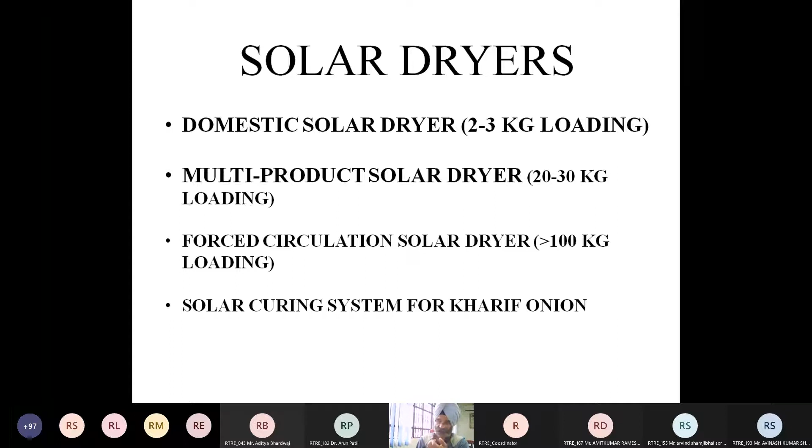So in the domestic solar dryer category, we have 2-3 designs, but this is the most recent one - the advanced domestic solar dryer, for which PAU has been granted a patent. The capacity is 2 to 3 kg of fresh produce, and generally the drying time is 2 to 3 days. For placing this advanced domestic dryer, you need a shadow-free space of 80 centimeters by 66 centimeters, and it has a natural circulation mode - we do not have forced circulation here, only natural circulation.

When you don't use it, you can place it anywhere - it has even been mounted on a platform with wheels, so you can easily move this dryer. Whenever it is not in use, you can place it inside your house, but whenever you want to use it, you can move it to a space where you have sufficient radiation. So you can see here, this is the area where radiation is captured, and from the underside of this portion, air gets into the dryer.

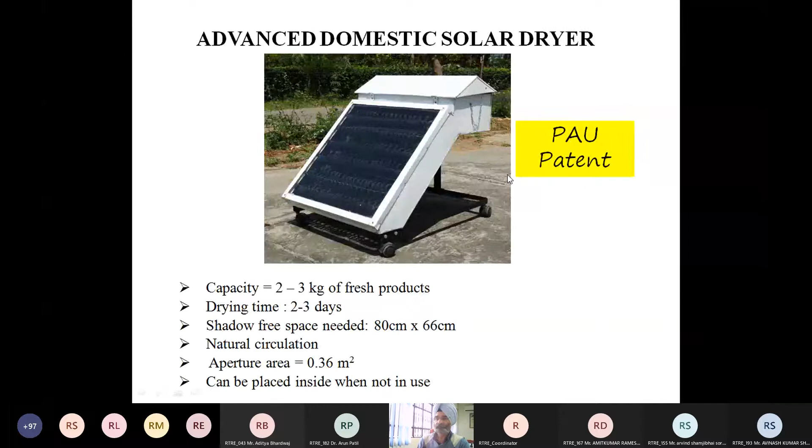Now you can see this is the drying chamber. We have two trays on which the produce is loaded. These trays are made of stainless steel wire mesh. As hot air moves from this side, it passes through the produce kept in the trays, and moisture is removed.

The unique feature of this dryer is that while all other domestic solar dryers have a flat black surface, in this dryer we have placed black metallic rings in front of the flat surface just to increase the collector area. These rings are blackened to absorb maximum radiation, so the heat transfer area has been increased. Drying time, compared to the conventional dryer, has been reduced by 40% with the use of these rings. The cost of this dryer is around 4200, and the payback period is around 200 drying days.

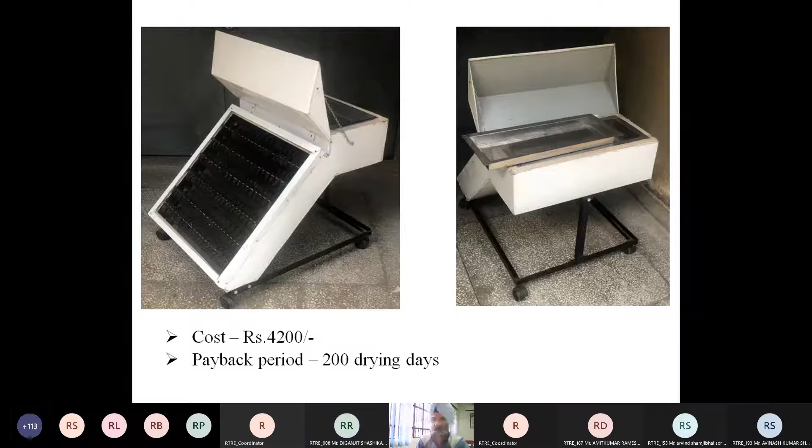Next is the evacuated tube solar dryer, and its loading capacity is between 20 to 30 kg. But this loading capacity depends upon the type of produce. If using low density produce such as spinach or chili, it could be low, but if using high density produce such as turmeric or ginger, loading capacity could be 40 to 45 kg.

In this crop dryer, we have used an evacuated tube collector. Previously we developed flat plate collectors also, but with the more efficient evacuated tube collectors, we have replaced flat plates. You can see these evacuated tube collectors - around 2, 4, 6, 15 evacuated tube collectors have been used to make the solar air heater.

Air is heated in these vacuum tube collectors, and at the top of the collectors there is a drying chamber, and at the top of the drying chamber a small exhaust fan has been placed. This exhaust fan is operated with the help of a photovoltaic panel just to draw the moist air out of the drying chamber. Since the produce is more, more moisture will be present, and we have introduced circulation of moist air with the help of the exhaust pipe and exhaust fan, which is operated with the photovoltaic panel.

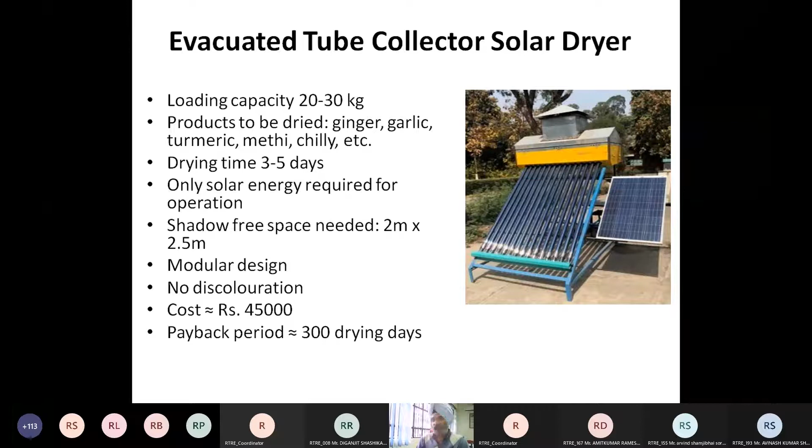Only solar energy is required to operate this, and the cost is around 45,000, with a payback period of 300 drying days. These are other views of this technology, and this is the view of the drying chamber - you can see we have placed 6 trays. Initially we had 3 trays, one single tray, but we divided it into two. Now we are loading 6 trays.

Instead of 3, we are using 6 trays for ease of operation, so it is easy for a single person to handle. Otherwise, if we use 3 trays, the size increases, the capacity almost remains the same, but handling becomes difficult. This chamber contains 6 trays, and this is the view of the tray. It is made of stainless steel wire mesh, so that any food product or agricultural product does not get contaminated during the drying process.

This chamber is insulated from all sides using thermocol, and you can see this is the thermocol which has been used for insulation purposes.

Around 13 installations for this kind of dryer have been made by PAU, and these locations are not only in Punjab but across India.

We have installed 2 such crop dryers in Dehradun in a society named Himmotthan Society, which is an enterprise of Tata Trust. They are using these two multi-product solar dryers for drying the fruit crop of different farmers.

The second one is Nature's Urja, which is in Himachal Pradesh, and there's one dryer installed in Punjab in Moga district, with 9 more such dryers installed at other locations. I don't have the details right now. So at 13 locations these dryers have been installed. Any questions?

Now, as one of the participants asked about the previous technology, the domestic crop dryer, regarding its size: the evacuated tube collector is 1.8 meters in length, with an outer diameter of around 58 millimeters and an inner diameter of 47 millimeters.

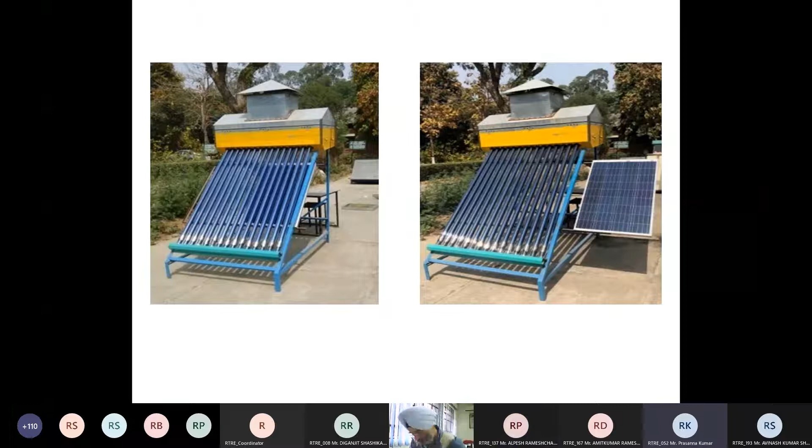How to decide the distance between each tray in the drying chamber? Or how to decide the loading capacity of each tray? Sir, actually, how much gap needs to be maintained between each tray in a drying chamber? Is it required or not?

It is required. I'll answer in two parts. When you carry out drying, preferably it should be thin layer drying. The depth of this tray is around 4 inches, so we fill this tray up to half of its capacity. When you carry out thin layer drying, then drying is faster.

If you carry out thick layer drying, then sometimes what happens is the lower part of the produce in the tray comes in contact with the hot and dry air and gets dried, but as the air moves up it gains moisture, and the upper layer of the produce does not get dried, rather it gets wet. So we have to carry out thin layer drying and keep almost half of the tray empty.

Hello sir, how can you control the temperature of this unit? Temperature can be controlled, yes.

It can be controlled because for every agricultural produce, the optimum drying temperature is up to 65 degrees centigrade. If the drying temperature exceeds that, the exhaust fan starts operating, and if the drying temperature is below that, it will stop working. So you can set that optimum temperature depending upon your produce.

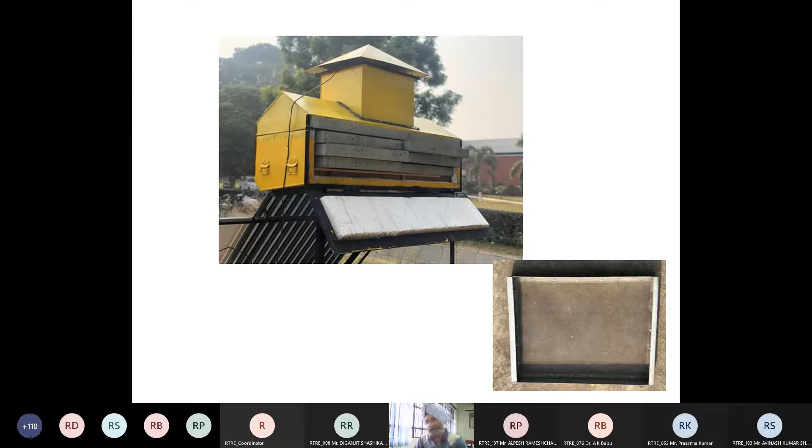We approached Punjab Energy Development Agency, which is a nodal agency for renewable energy technologies. They have funded around 9 such dryers, installed at food process organizations and small cooperative societies. They process fruits and vegetables, and are also into pickle making. They funded the entire cost for such organizations.

Again, our industry partner is Vishwakarma Solar Energy Corporation, situated in the town of Phillaur, near Ludhiana.

Now next comes the forced circulation solar dryer. This dryer has been adopted in maximum numbers, not only in Punjab but at the national level also. We started working on this dryer in the year 2010. We came across a number of agro-based industries which wanted large capacity dryers they could use commercially also.

Otherwise, till then we had these small capacity dryers meant to be installed at a house or at the domestic level, or small agro-based industries having a capacity of 40 to 50 kg. We realized that if we want to use solar energy for drying crops, then we need large capacity systems. So we visited a food processing organization called FAPRO.

In this society, there are 300 farmers who are into cultivation of turmeric only, not wheat and paddy. As you are probably aware, in Punjab a lot of emphasis is now going on moving away from paddy and wheat because of the depleting water table. We are using excessive groundwater for cultivation of paddy, and due to that the water level is going down, and turmeric is seen as one of the alternative crops.

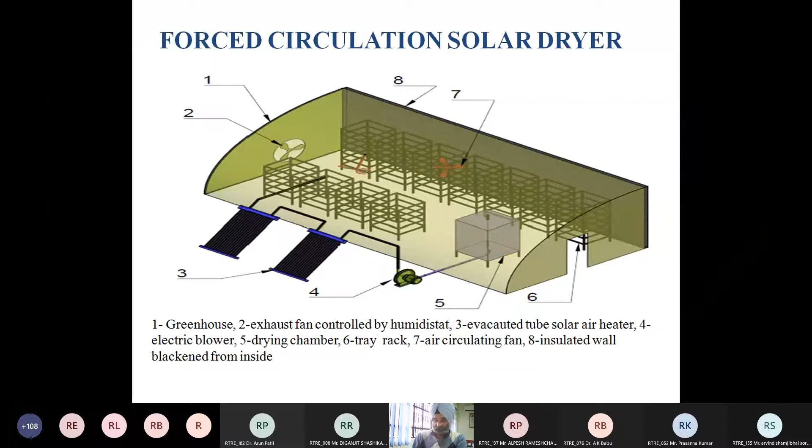Coming to this installation, as I've told you about the society of 300 farmers who are into turmeric cultivation, this dryer has been installed in the premises of that society.

You can see this is a pakka floor, right? And this floor was used to dry turmeric under open sun conditions.

So when we installed this dryer over there, the drying time reduced to 55%, and the quality of the product was better, not only in terms of color but also other quality parameters which I have mentioned, such as curcumin content as well as oil content.

And apart from that, polishing loss was also less. Polishing means the removal of the outer skin, and it was also less. The reason is, when they were drying the turmeric under open sun conditions, as I mentioned earlier, when the produce is wet, it will attract more dust.

So to remove that dust, more skin has to be removed. But under the forced circulation solar dryer, the product is not exposed to atmospheric dust, so polishing loss is also less.

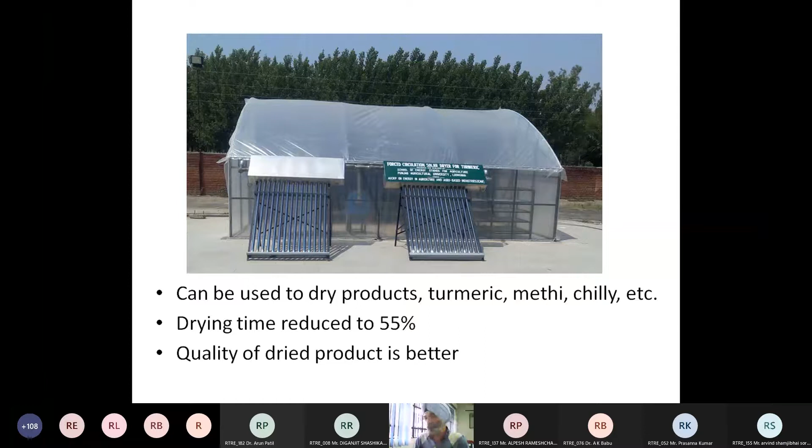We have placed the blower inside the greenhouse, thinking that some heat will be generated in the blower also, which we can utilize over here.

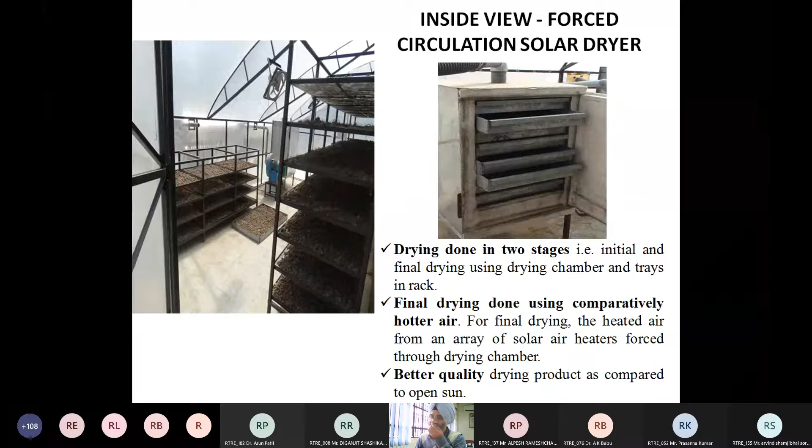So this is the inside view of the empty greenhouse. This is the exhaust fan, which I have told you, which is operated or controlled by the humidity controller and temperature controller.

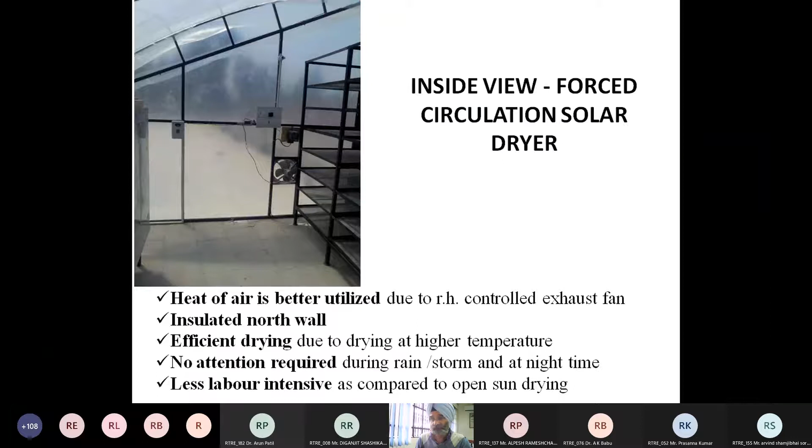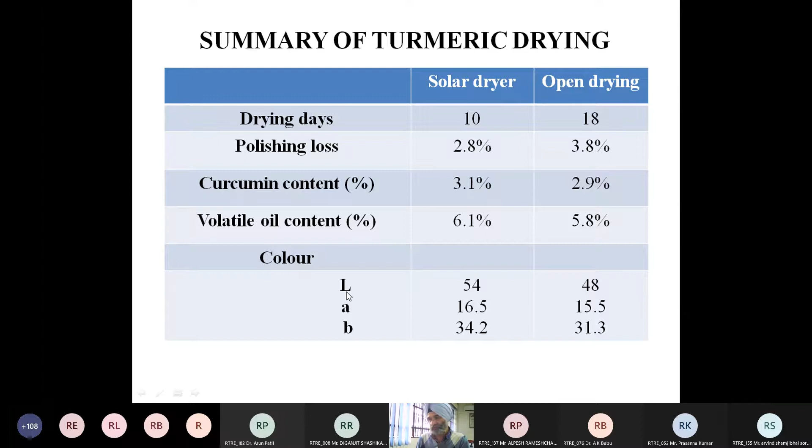No doubt it is marginally better, but it is better. And for color, these are the L, A, B values determined with the help of an instrument, and they have different significance. I will not go into the details of food processing, but they are better.

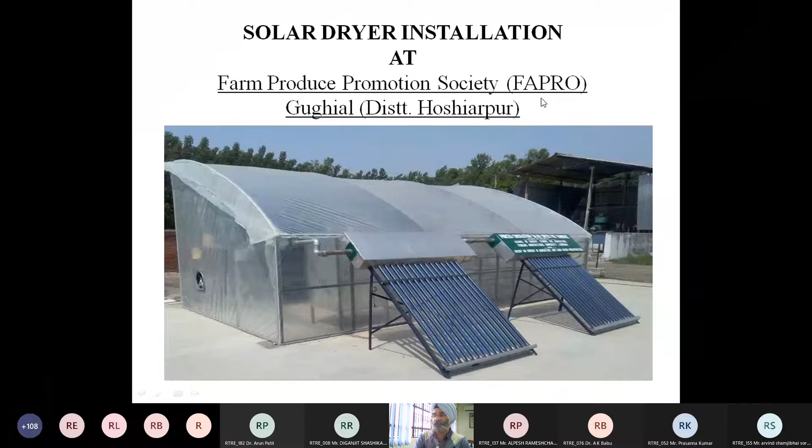I'll just show you a video.

So this was just a video of installation at that society. Now the next one, the next installation, is at the field of a farmer.

In fact, the person is not just a farmer, he is a technocrat. He retired from Hindustan Machine Tools HMT Pinjore near Chandigarh as a general manager, but he got interested in farming as he wanted to go for cultivation of crops other than wheat and rice.

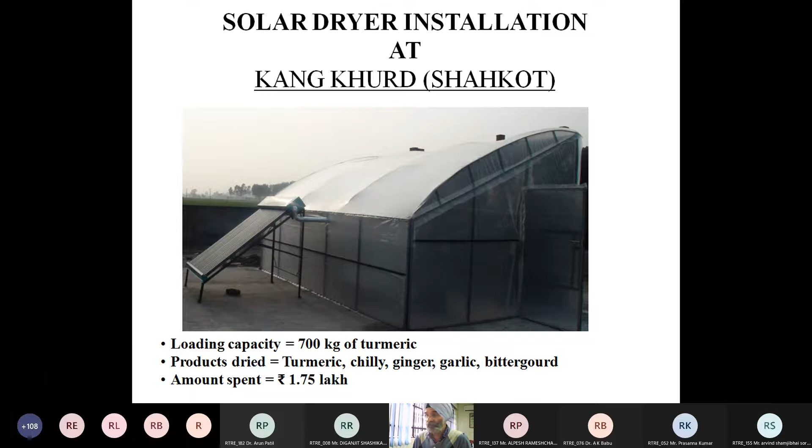This was also to show others the way, that you can go for cultivation of other crops instead of wheat and water-guzzling rice or paddy. Now here is another important aspect which I want to show.

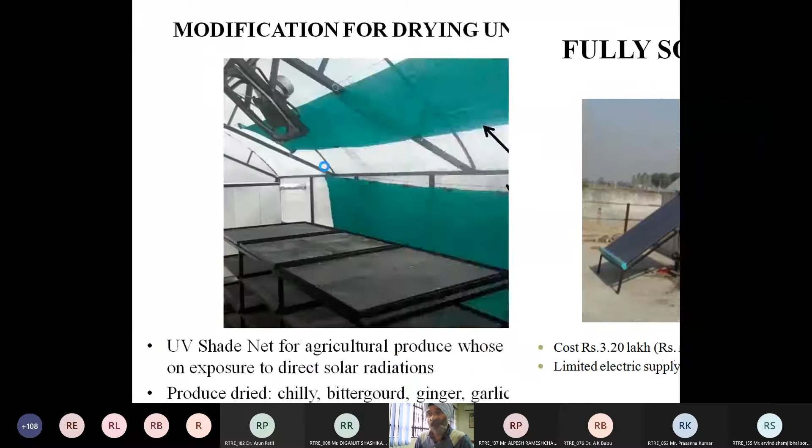As you are aware, drying is carried out by hot air, not by radiation. So radiation shields have been provided over this rack so that the produce is not exposed to radiation. This is a fan, several of which are installed inside the greenhouse to enhance air circulation. Similarly, the back row has also been provided with these radiation shields or green nets.

So again, what happened when we went for installation, you can see these solar panels. As I've told you, fans are there inside the greenhouse, and a blower is there which requires electricity. In the village, he was not getting regular supply of electricity, but he was having a 2 kilowatt solar water pump, which was not operational because the depth of water had gone down.

So these PV panels were lying idle. So instead of using an AC blower, we used a DC blower as well as DC exhaust fan and circulating fans, and connected these DC blower, fans and exhaust fan with the photovoltaic panel. So this solar dryer is completely operated by solar energy. No grid connected energy is used over here.

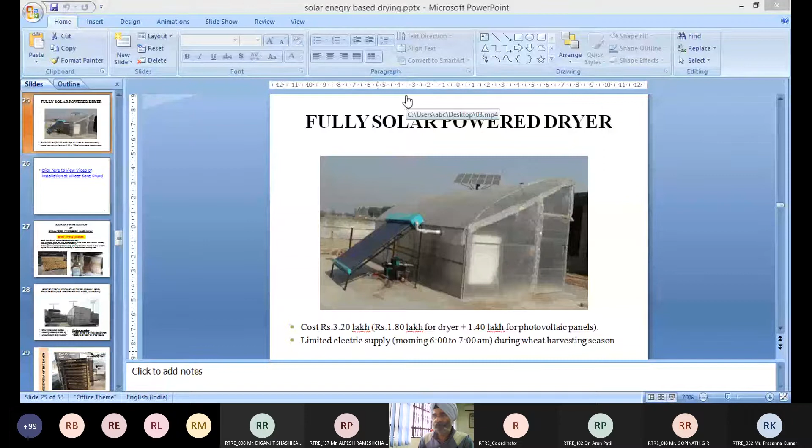Now this slide is visible fully. Yes, sir. Your slide is visible. Okay, this is also visible. Yeah sir, click here to view video. The slides are not moving, sir.

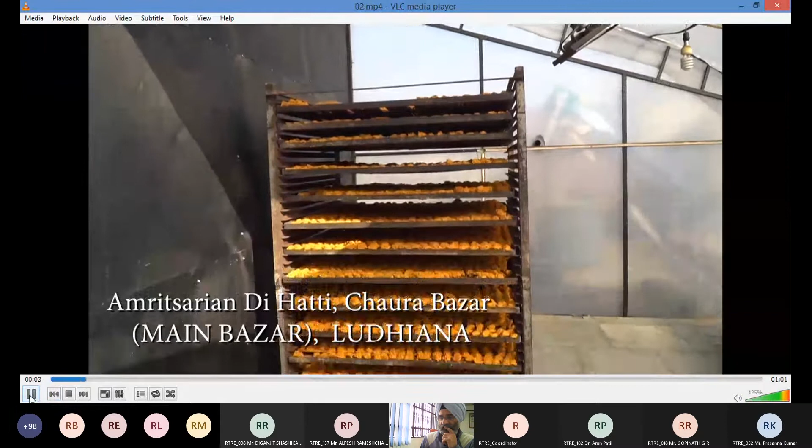Was it visible or not? Sir, your screen is visible, not the video. Video is not visible. Yes sir, now it is visible. Okay, okay, okay, now I'll go back to that. Now I think it should be visible. Yes sir, yes sir.

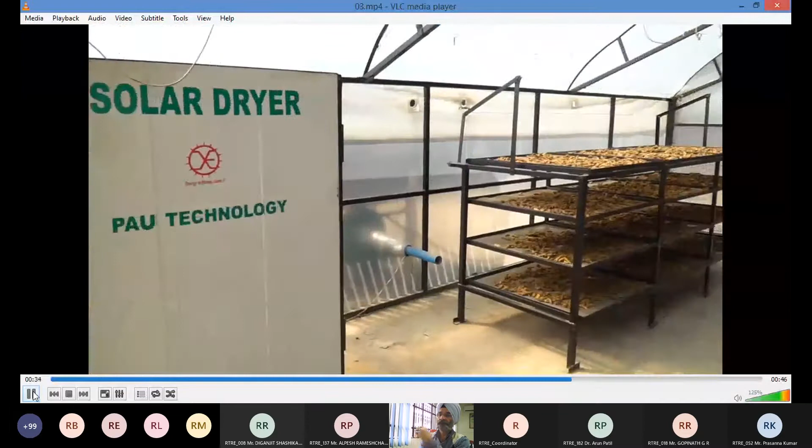Apart from that, we have also installed this dryer in Ludhiana city itself. If somebody has happened to visit Ludhiana, there is an old city, and in that old city we have got a market called Chaura Bazar. In that bazaar we have got a small food processing unit making vadiya. Vadiya is actually pulse that is ground, then oil is added, and different masalas are added, and then they are dried. It is called vadiya in Punjabi - you may call it something else at your place. Most of you must have seen and used it. In that processing unit, the wet vadiya were dried in two phases.

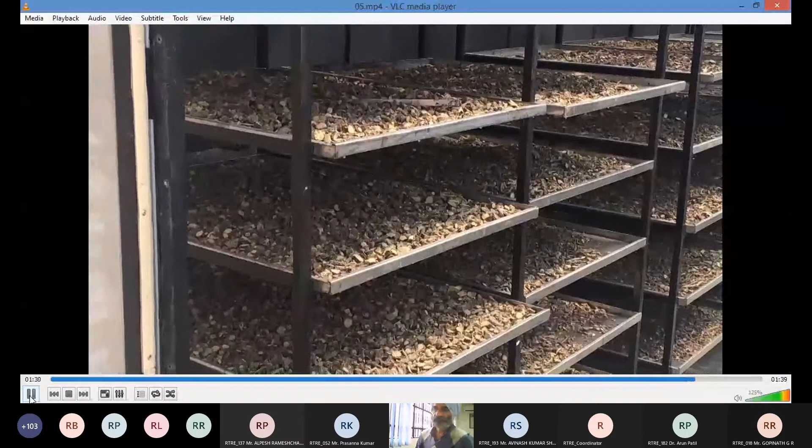So these are a few videos of the installation.

Then, as I mentioned, for drying of apricot, again with the Himothan Society, a dryer has been installed.

Hello sir, yes, the slide is not moving sir. Not visible, slide is not moving sir.

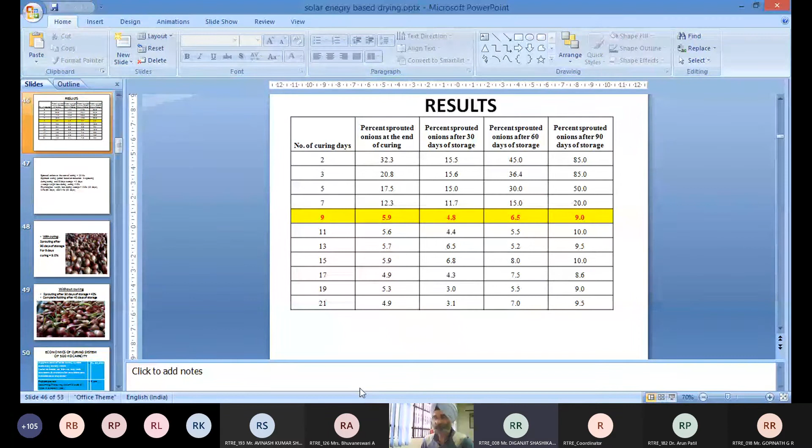And what about the greenhouse glazing cover, sir? It is only low density polyethylene sheet, LDPE sheet.

I just caution one thing, this sheet needs to be replaced. We recommend that it should be replaced after 3 years of use.